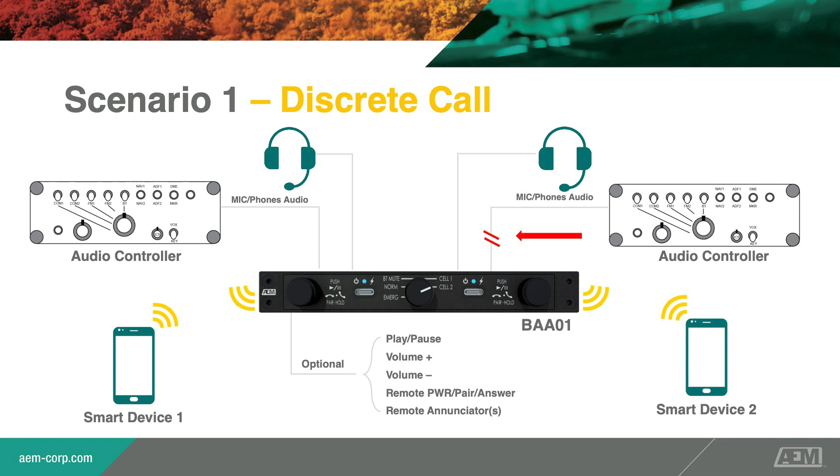From the front panel, the Bluetooth connection can be removed from the ICS. This setting also attenuates receive audio and ICS audio by 3 dB. The user is then free to have a private conversation using the connected device, while retaining the ability to hear important communication from the pilot, co-pilot, or passengers. This functionality will be highly sought after by DEA, FBI, corporate users, tech-savvy passengers, and many others.

Scenario 2: As a transceiver position. In this scenario, the BAA01 acts as a standalone transceiver from the audio controller point of view. To participate in a connected call, the user selects the BAA01 transmit position on the audio panel and routes the mic audio to the device using the push-to-talk key, the same as would be done with any transceiver. Audio from the connected device can be monitored using the appropriate audio controller receive switch.

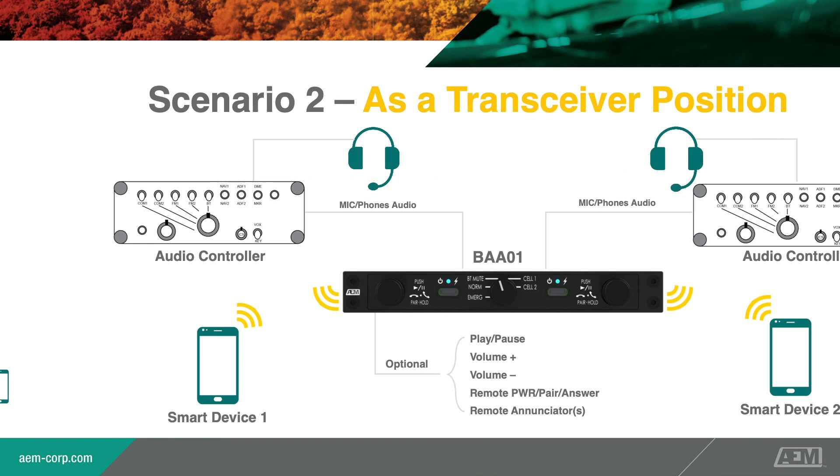Scenario 3: Passenger Bluetooth connectivity. Connect as many passengers to their devices as you want. With no need to change audio controllers or passenger headsets, simply insert the BAA01 into the ICS line of the existing audio system. Now, your passengers have the ability to listen to their devices, make discrete calls, charge their devices, all while maintaining their connection to the aircraft intercom system.

Lastly, Scenario 4: Glass cockpit connectivity. AEM audio engineers have put the hooks in place to connect the BAA01 to your glass cockpit. The protocol would be provided by the OEM on a case-by-case basis.

The TSO pending release of the BAA01 is June 2020. For more information, see the AEM website, aem-corp.com. Thank you for watching.

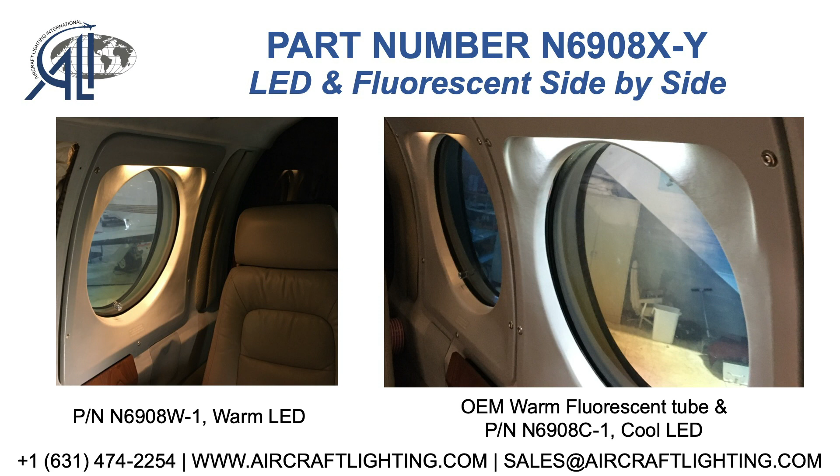The improvement in lighting from ALI's LED window lamp is self-evident, as you can see in this slide. Starting from the left, you have ALI's LED window lamp in warm white. Moving to the right, you'll find the OEM fluorescent lamp in warm white next to our LED lamp in cool white. A stark comparison. Note that ALI's LEDs illuminate the entire window frame on that King Air, and it provides a cleaner, fuller look. It's a simple upgrade that can totally change the entire feel of the cabin without changing anything else. We've installed this now on several aircraft, and the feedback is resoundingly positive.

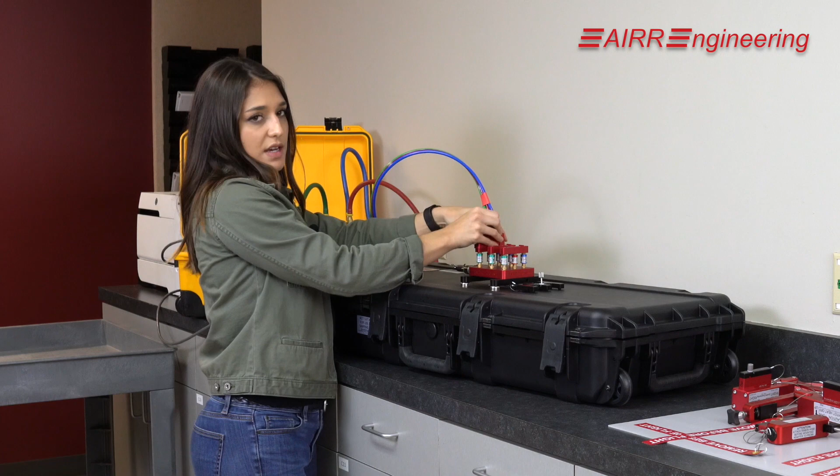Now let's take a look at how the ribbon hose speed connector attaches to the distribution manifold. First, we want to remove our dust caps. Get your hose number 1, remove another dust cap. Align the connector, tighten it down, store your dust cap, and do the same thing for the next 2.

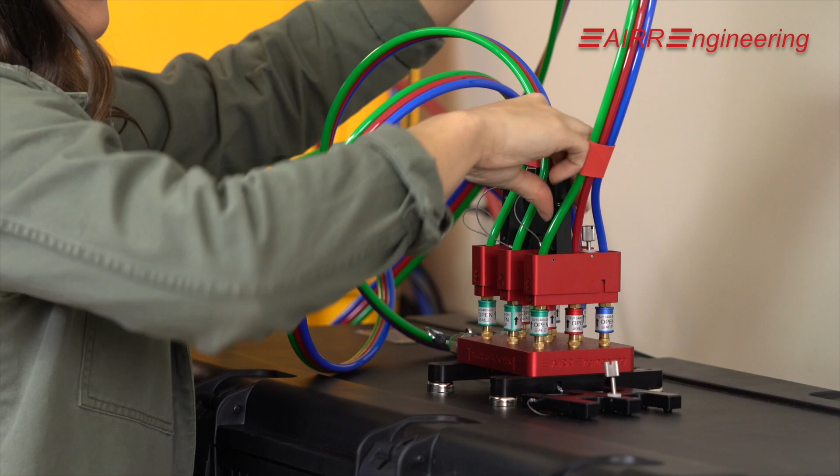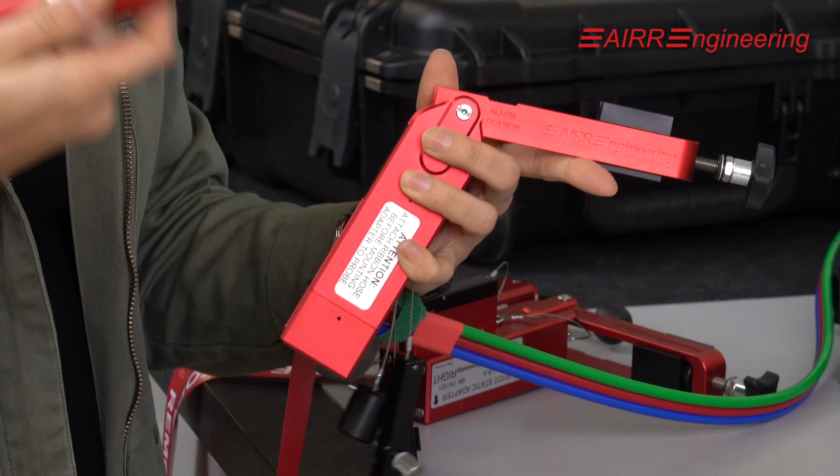Now that we've made our connections to the distribution manifold, we're going to move on to the pitot-static adapters. Same process. Tighten the connector down, remove the internal dust plug. Then you want to insert the test plug, swing the cam arm up, and tighten down the pusher. Now we're going to repeat the process with the other adapters.

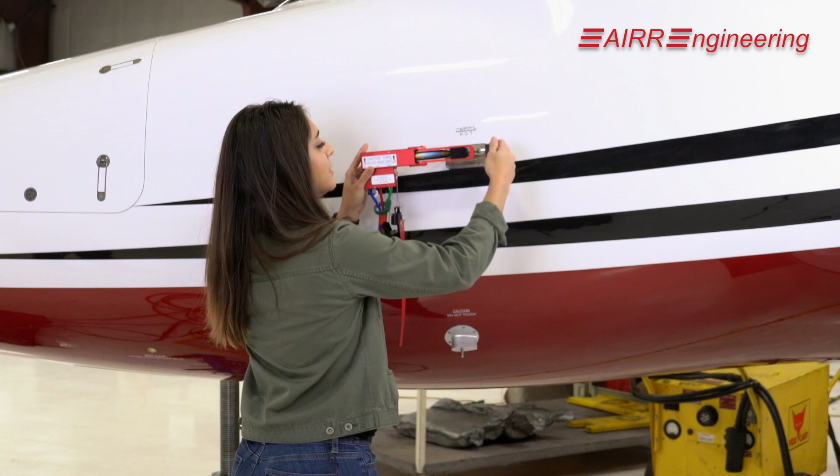Slide the adapter onto the pitot tube, rotate the arm, tighten the pusher. Lastly, you want to get your pitot saver, do a battery check. Sounds good. And pop it on. And then you would repeat the process on the other side. Just that fast, just that simple.

Activating pitot heat on a stationary aircraft can really mess up your day. AIRR Engineering has developed a simple, economical solution to warn personnel of this very dangerous situation, and we want to show you how it works.

Hi, I'm Carrie with AIRR Engineering. During years of being involved in aircraft maintenance, we've seen far too many instances of unintended pitot heat causing severe burn injuries, unnecessary downtime, and costly repairs. To prevent this situation, we have developed the pitot saver pitot heat alarm.

The Pitot Saver is an easy-to-use tool that attaches to the pitot probe in seconds and warns anyone in the vicinity if temperatures in the probe reach elevated levels. The Pitot Saver is available in single and twin sets, comes complete with custom padded hard case, flags, batteries, and instructions. The device is constructed from rugged aluminum alloy and polycarbonate.

Every tool is proudly built in the USA and is backed by AIRR Engineering's standard of excellence. Designed to work with the pitot covers or in conjunction with other testing equipment, such as our innovative pitot probe adapters, the Pitot Saver uses audible and visual alarms to warn of pitot heat activation.

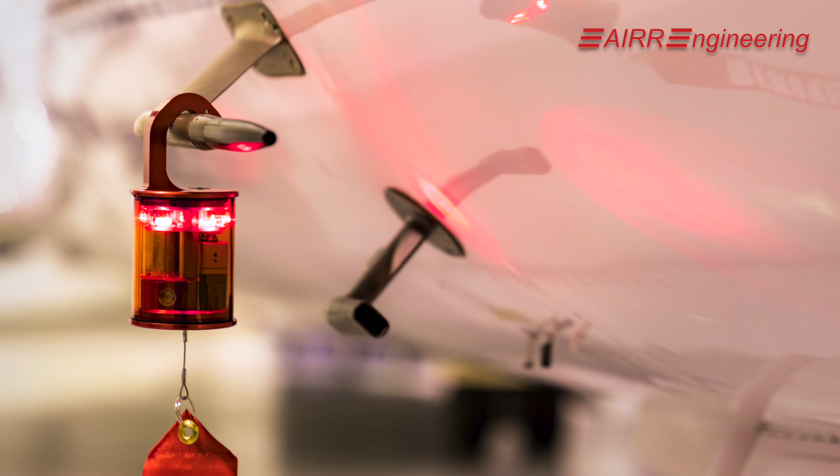The Pitot Saver is always on and ready to go. Just do a quick battery test and then hang it on the pitot probe. One alarm is used on each pitot heat circuit.

On the ground, pitot probe temperatures can reach extremely dangerous levels. During routine maintenance, the pitot heat can be triggered unintentionally by airspeed, altitude, a wheels-up sensor, system power, etc. As you can see, when the pitot temperature approaches a dangerous level, bright flashing LEDs and a piercing alarm will alert anyone nearby that something is in need of their attention.

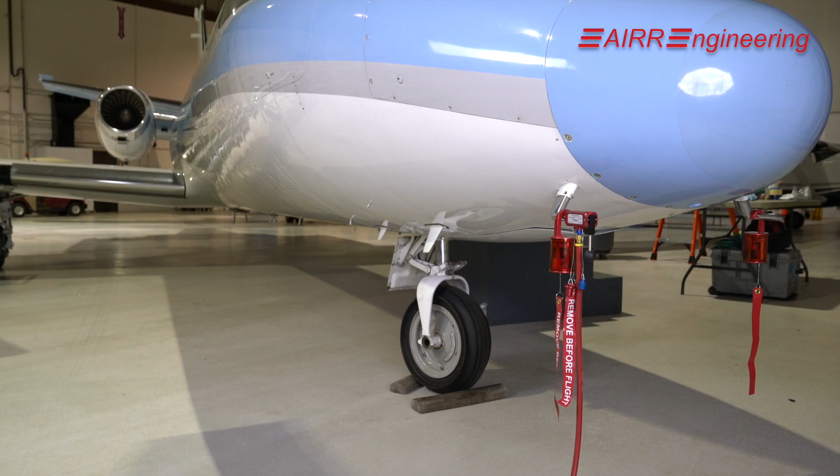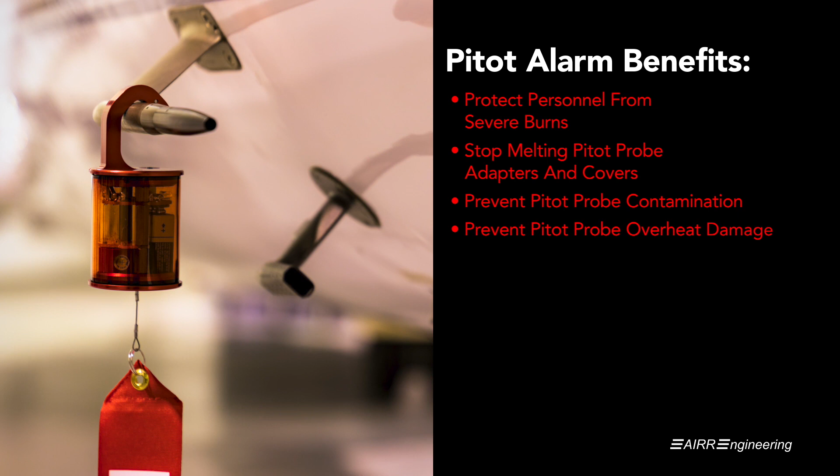Protect personnel from severe burns. Stop melting pitot probe adapters and covers. Prevent pitot probe contamination. Prevent pitot probe overheat damage. Protect the integrity of the flight data system. Prevent unsafe flight or grounded aircraft. Avoid unnecessary liability. And meet OSHA 29 CFR Part 1910.138 safety requirements.

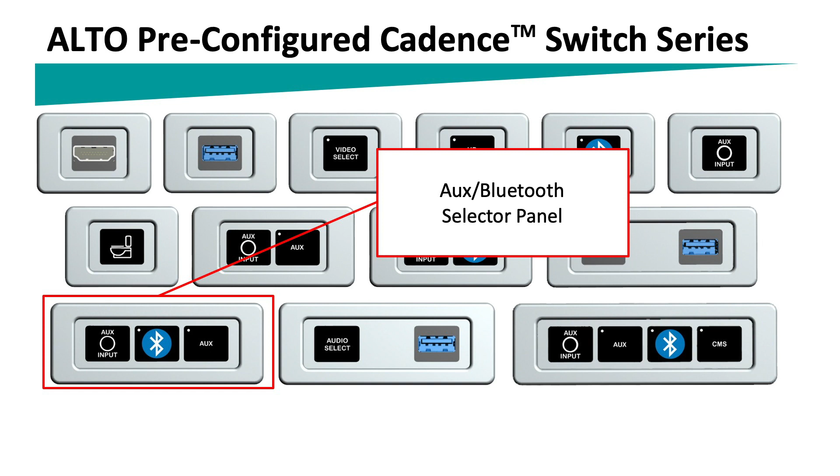We can provide panels for those customers that wish to add headphone audio to their aircraft cabin. This combined HDMI, USB, and aux input panel is a great addition to an entertainment cabinet for a new HD and audio source.

Many entertainment upgrades interface to existing composite video and wish to select HD as an override to their monitors. This solution allows HD override with the source input.

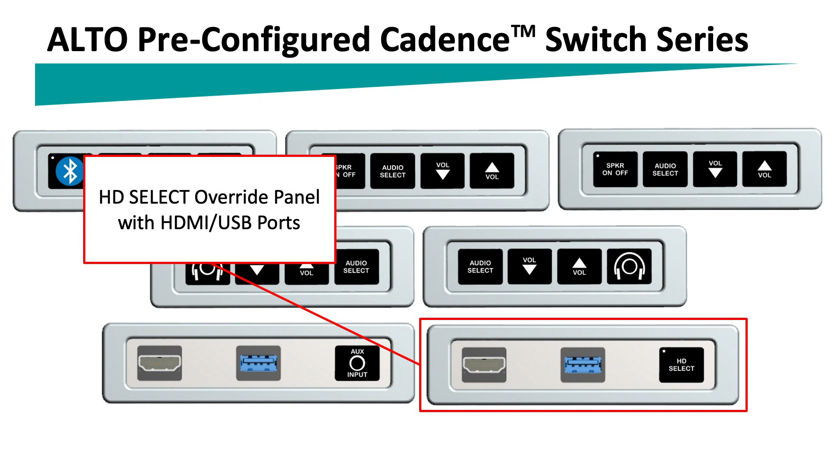Here is a complete entertainment control panel option for any cabin aircraft system. We offer an Apple TV interface panel as well, which features HDMI input with an RJ45 port for hardwired Ethernet connection to the cabin router.

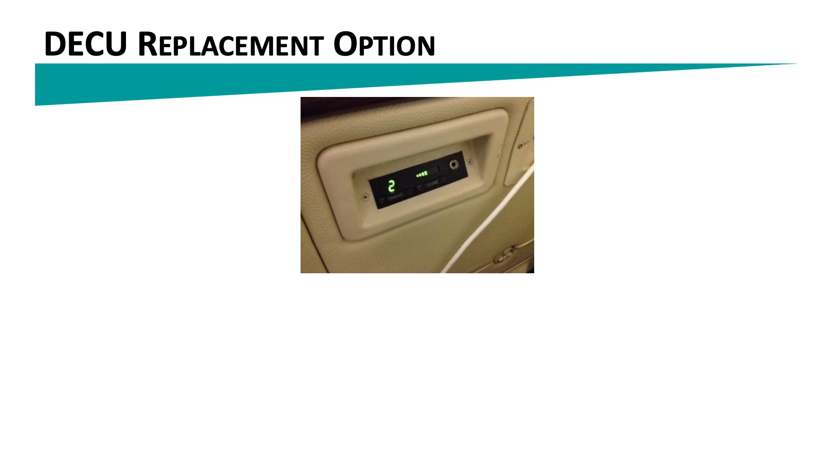Another set of panels included in this pre-configured cadence switch series is a Baker DECU direct fit replacement option. We offer a standalone USB charging option.

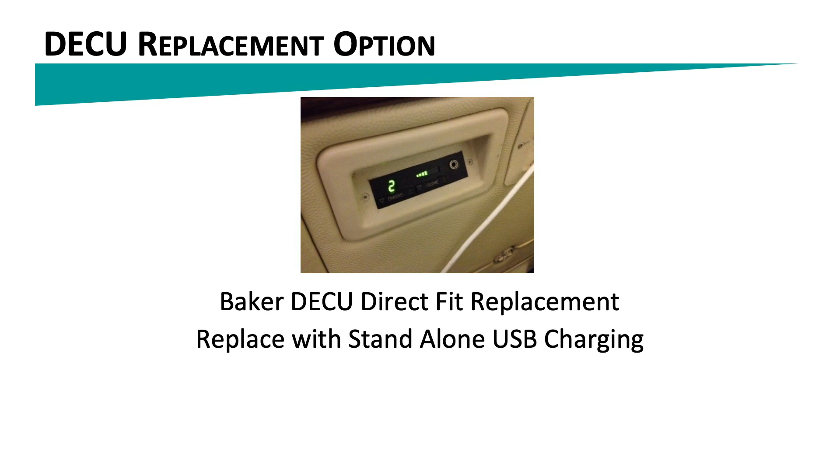We convert the former wired headset to wireless Bluetooth headphones. We also offer read and table lighting controls.

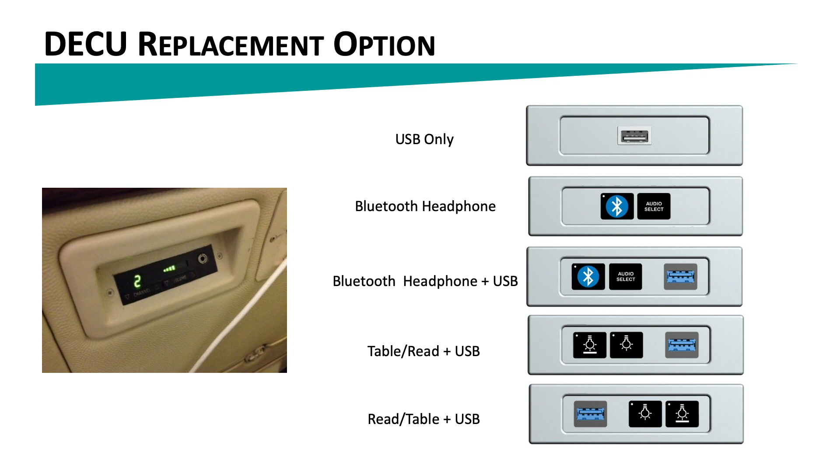These panels mount from the front and drop into the same cutout as the former Baker DECU. The direct fit replacement eliminates interior modifications and helps expedite the changeover to ALTO.

The last feature of this pre-configured series is our source equipment trim plate adapter. This adapter is designed to fit any single DIN packaged source equipment. We can support car stereo head units.

The source equipment trim plate is also front-mounted and fit compatible. There's no need for any interior modifications. These options allow Bluetooth audio to replace the former source equipment.

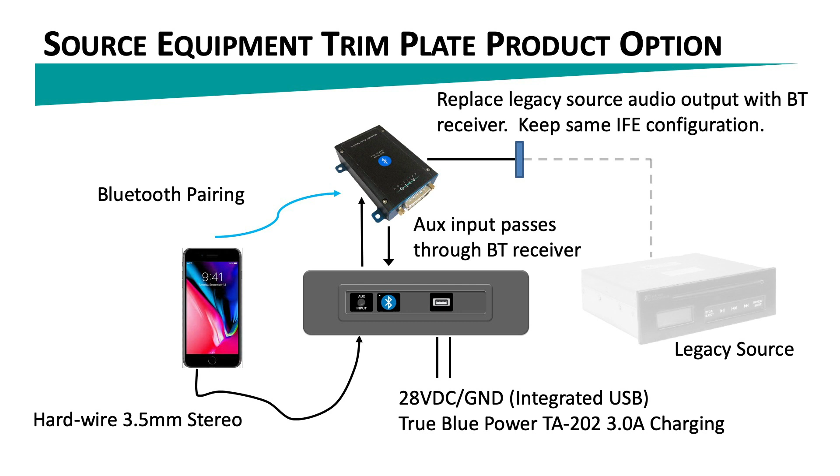Panel option 1 allows a hardwired input in addition to Bluetooth pairing. Panel option 2 adds a 3-amp USB charging port. In most cases, the existing wiring can be maintained, resulting in a quick and simple update.

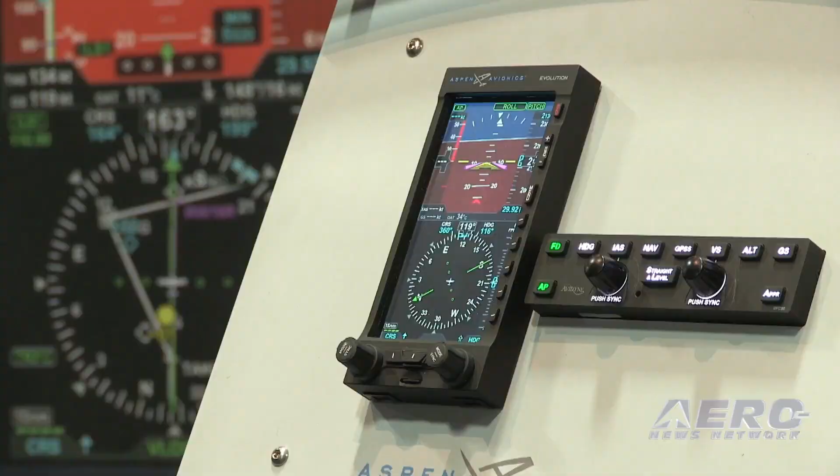But more than this, ANN has served the avionics community with distinction. Over 12 years of live streaming coverage of the best the avionics industry had to offer at AEA conventions, hundreds of stories and interviews, hundreds more video presentations, insightful coverage of the avionics business and the way it promotes and pushes aviation forward. No other aviation publication has done as much as ANN has on behalf of the avionics world, and it's about to do more, much more.

ANN's airborne video news program will soon include a new weekly program just for all things aero-electronic, a program we call Airborne Avionics. The painstaking results of nearly 2.5 decades of expert aviation journalism, Airborne Avionics is designed to bring this industry the kind of professional new media coverage it deserves and has needed for years.

No matter what aspect of aviation you work in, the Aero-News Network remains your best option for staying educated, informed, and entertained.

Traditional methods for modifying aircraft with new systems can be expensive, time-consuming, and might introduce certification complexity that complicates installation. NEXSYS Component Technology addresses these challenges.

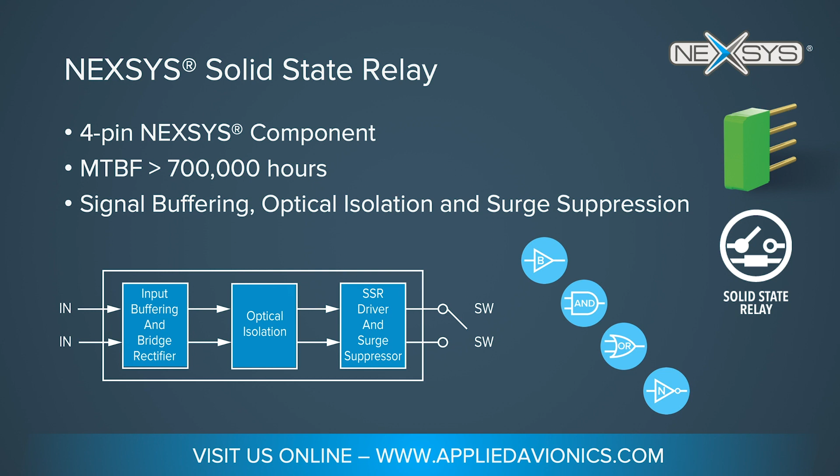In keeping pace with the industry's technology paradigm, our team went back to work. And I'm pleased to introduce to you the NEXSYS Combination Solid State Relay, or SSRC. This new 8-pin device takes the standard SSR to another level.

The new combined component packages together 4 internally connected SSRs, which increases wiring efficiencies by reducing the need for external splices. The combination SSR allows for synchronized normally open and normally closed signal switching with a bidirectional control bridge, which allows DC voltages to be applied in either direction to provide design flexibility.

The new SSRC can switch all 4 signals in parallel and offers several specific combinations, with the most typical being 4 SSRs with a single common, a dual connected pair of SSRs with 1 common per pair, and 3 SSRs connected to 1 common and 1 SSR to another.

We intend to continue developing new products, which extends the capability of NEXSYS interface solutions. As we continue to innovate, look for new NEXSYS products that provide similar wiring efficiencies and form factors.

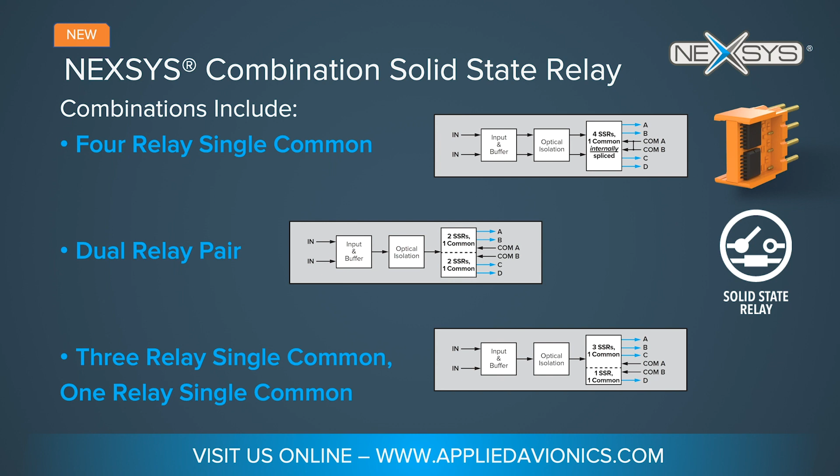Applied Avionics is committed to maximizing value through design, technology, and supporting each phase of your application. This means that NEXSYS customers have direct access to the application development team. Whether requirements are straightforward or complex, these subject matter experts can review your requirements and make recommendations to help design an electrical interface for your application. They're equipped to provide technical specifications, engineering assistance like developing wiring diagrams and generating LT-SPICE electronic simulations, to providing 3D models and even part configuration.

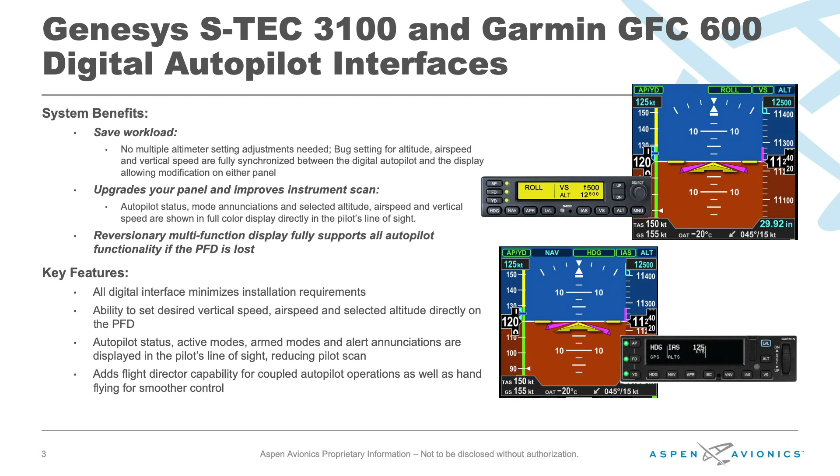With that, you would have full reversionary backup with all the autopilot functionality. So if you had a failure on your Pro, you simply would push the reversionary key on the MFD, and you'd be able to control all the features from the autopilot on the MFD.

Let's talk about new software on the Aspen E5. This new software gives you a traditional looking HSI, and we don't charge for that. You literally go into your local avionics shop, they can update your software for you at no charge to Aspen—you'll probably have to pay some shop time. If you order a new E5 today, you're going to get the traditional looking HSI.

For an optional feature, less than $500—$495—we've added a data bar which gives you true airspeed, ground speed, OAT, wind direction, and speed. That's really slick and a very powerful feature. Think of it like an air data computer. As you're coming into an airport, it's going to show you which direction the wind's blowing from and at what speed in real time. Once you're at altitude, you can see exactly how much headwind or tailwind component you have. Very nice feature.

The other thing is the GPS annunciator. Let's say you have a GPS in your panel that's outside the pilot's field of view—you're required to have an annunciator in front of you showing what mode the GPS is in, whether it's GPS or VLOC, whether you have a message, or you're approaching a waypoint. There are several annunciations required to meet the requirement. The Aspen E5 has all these built in, and we'll display those for you, so that allows you to avoid installing another annunciator.

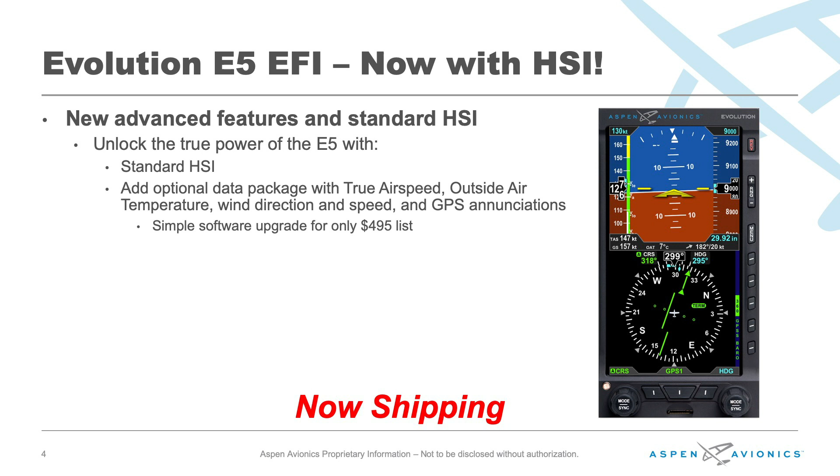All of those things are $495. It's kind of a no-brainer—a lot of bang for the buck there. So if you're thinking about an E5, definitely think about doing that optional data package.

We are announcing our new simplified pricing. When you purchase a Pro or MFD Max system, it's now going to include synthetic vision. A Pro is now $9,995, and that does include the Pro Max, which includes synthetic vision. Angle of attack and ADS-B enablement is $10,995. So for $1,000 more, you're getting two additional items, the angle of attack and the ADS-B unlock, which will display traffic as well as NexRad on the Pro.

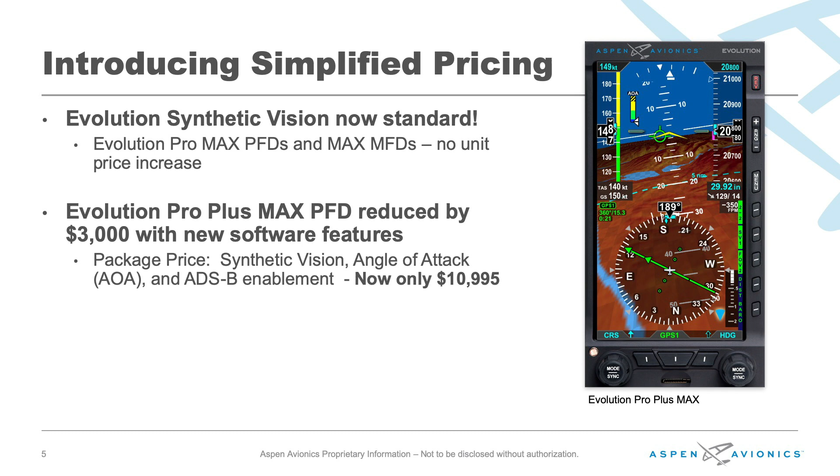Aspen is pleased to announce our multi-unit pricing reduction, starting with the 1500, which includes a Pro and 500 MFD, for only $13,995. Our most popular system, the 2000 Max with external battery, is only $15,995. With that system, you don't need any backups. You can literally cut a new panel, put in the two screens, and be done. You can really clean up your panel, pull out your vacuum system, all with the Evolution 2000 Max with external battery—only $15,995.

Our 2500 system, which includes the Pro, the 1000 MFD, and the 500 MFD—and the 1000 MFD would have the external battery—is now only $19,995. So the biggest difference between a 2000 and 2500 system is the addition of that 500 MFD. Also note that external battery is now standard on the 2000 and 2500 systems, an additional $1,000 savings.

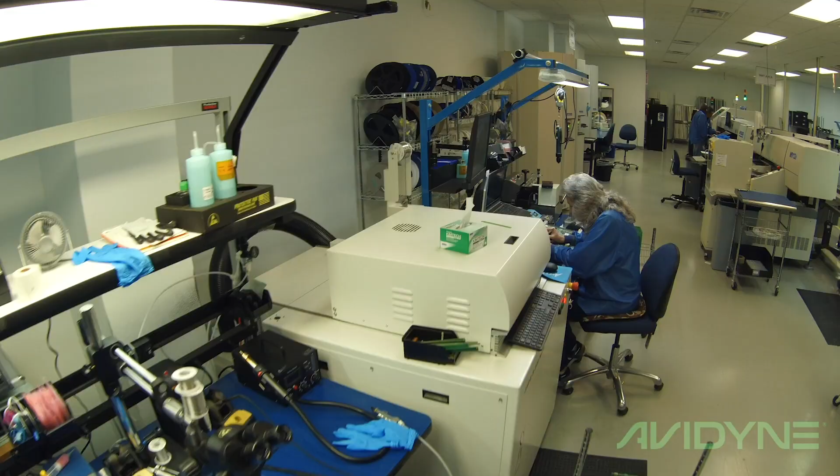Avidyne is very well positioned in the avionics market today. 2020 is the year where we're going to take some of the business aviation progress we made in 2019 and really turn it into a central focus. General aviation has been the cornerstone of our business at Avidyne for over 25 years. We've taken what we've learned there and applied it to other market segments, helicopters and business aviation. Even with our growth upmarket, we continue to develop innovative products that benefit all of our pilots. Our pro pilots were telling us, I wish I had the function of our IFD in the FMS that I fly every day.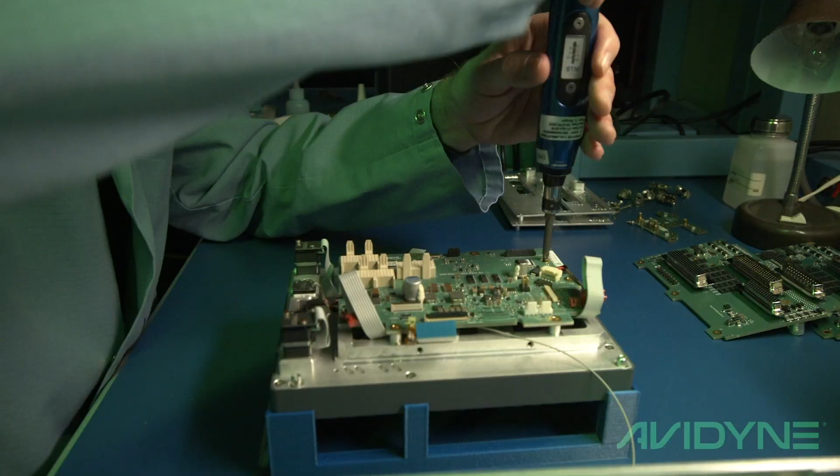So we listened, and in the fall of 2019, we launched Atlas. One of the real values of Atlas is that it gives new life to legacy aircraft that don't need a $1 million avionics upgrade, but would like to have LPV, be able to run their TCAS, and consolidate their controls in an easy-to-use, understandable format.

The Avidyne approach is to develop a partnership with our dealers, not tell them what to do, but provide them with the tools they need to be successful. In 2020, Avidyne will be launching our new dealer portal, as well as our training app, which will give our dealers access to installation documents and training videos from their mobile device while in the aircraft.

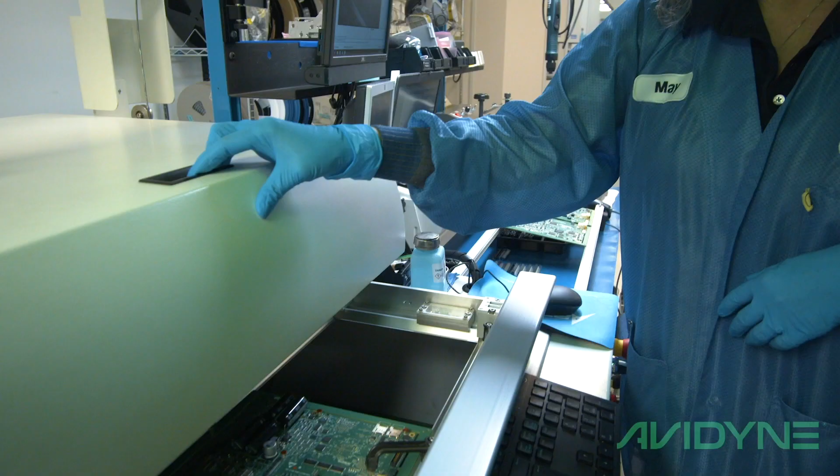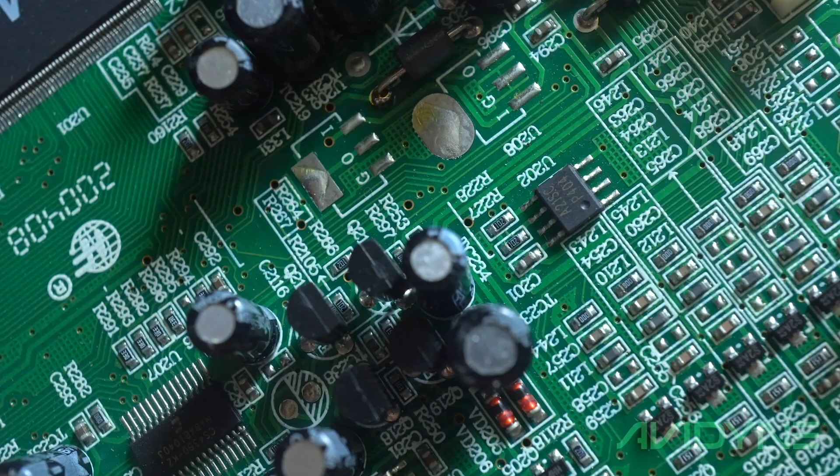Avidyne has made, in the last year or so, significant investments in a number of areas. We've replaced our screen printers, our pick-and-place equipment, and our selective soldering systems, which allows us to build a lot more cards for the expected volume we're going to have in the future. We build very high-quality cards with these systems, and we'll be doing so for a long time.

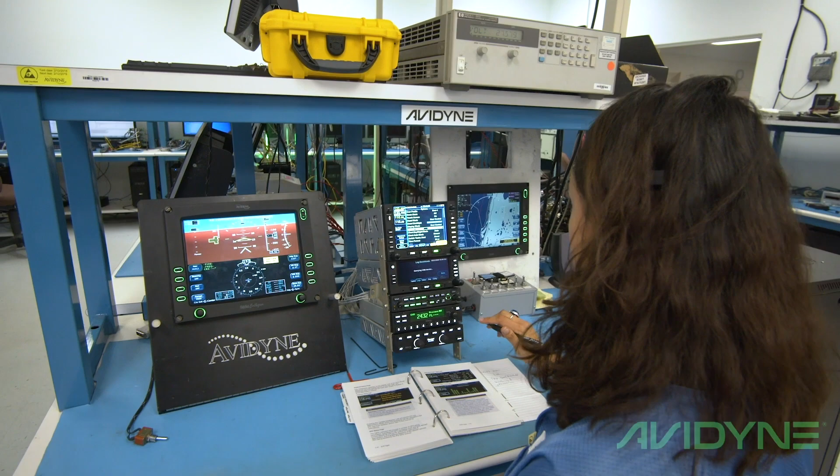In addition, we have a project going on at the Orlando Melbourne Airport where we're building our own hangar, which will allow us to improve our certification test flight activities along with better accommodating customers who fly in to visit us. Going forward, the future is bright for Avidyne.

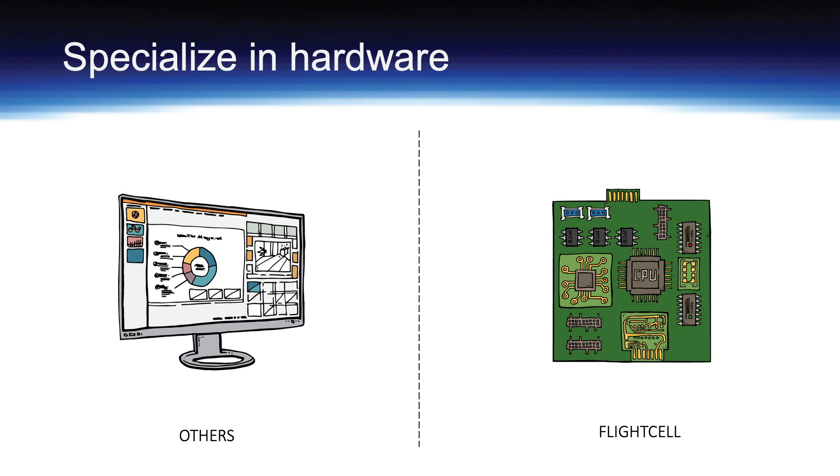Flightcell International is a pioneer in aviation communications, and it has never followed what other companies have done. For example, Flightcell decided some time ago to focus on hardware and its associated firmware, and to not be distracted by software services such as mapping and airtime. This means customers can use any service provider with their equipment.

When they designed the Flightcell DZMX product, the trend at the time was to have multiple units, a transceiver in the avionics bay, and multiple control and display units for the crew. Whereas with the DZMX, they produced a single, compact unit that is installed in the cockpit, with an optional remote head unit for the cabin, if required.

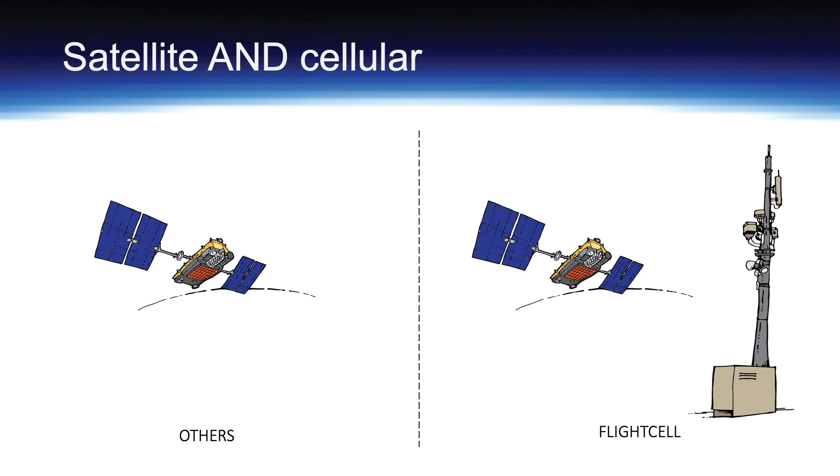In most cases, satellite only has been the preferred technology used for voice, data, and tracking. Early on, they added cellular technology to the mix and offered both satellite and cellular capabilities and the efficiencies and cost benefits that it offered customers. You are probably thinking, that's all very nice, but why are you telling me this? I'm telling you this because for a brief period, they're going to conform and do what others have been doing.

The new product has a transceiver unit that fits in the avionics bay, and in some cases, it is close to a direct swap out for existing legacy SATCOM units. Operators can now upgrade to the latest technology without major installation changes. Flightcell have called it the DZMX Plus.

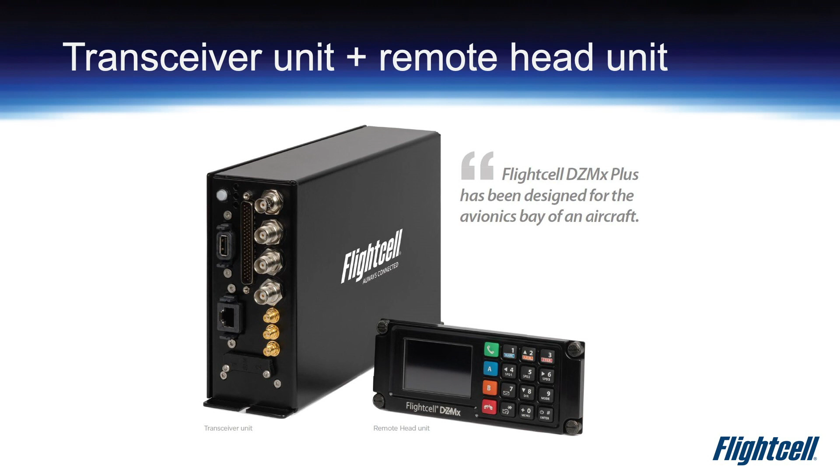It has all the functionality of the DZMX product, but in a different form factor. A larger form factor allows for additional hardware functionality to be added at a later date. It uses the existing DZMX remote head as its user interface. The transceiver unit has 4 connectors for exterior antennas and 3 SMA connectors for Wi-Fi and Bluetooth antennas and for ADS-B in functionality, which they are aiming to have available later this year.

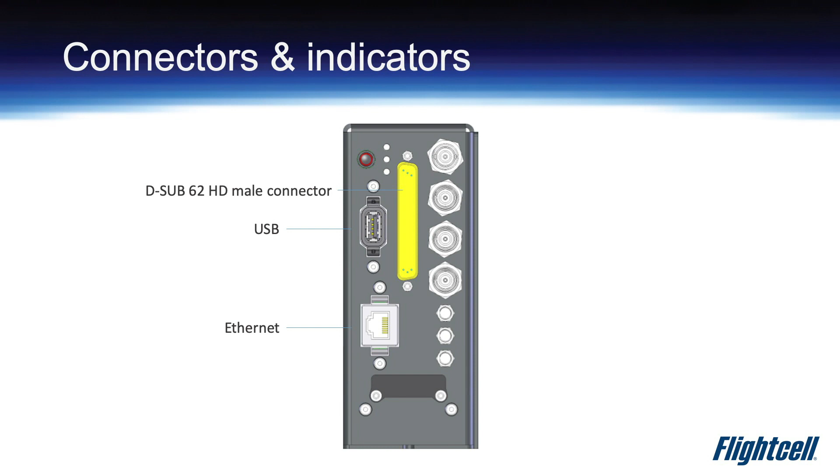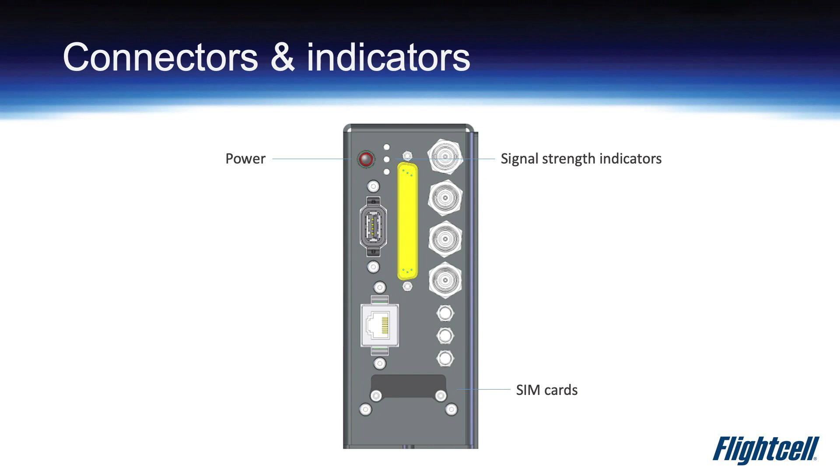There's a D-Sub-62 connector for power, external inputs and outputs, and control. There's a USB port for firmware upgrades and transfer of files via Dropbox, and an Ethernet port for connected devices, giving them access to the internet via cellular data. There is a power button, 3 signal strength indicators that indicate the strength of received modem signals, and 2 SIM card slots. From the get-go, the DZMX Plus will have all of the core capabilities of the DZMX and all of the add-on options and apps listed here.

We've released 2 brand new options recently. The first is a direction-finding capability for search and rescue. When paired with the Rhotheta RT-600, it lets air crews use a tablet to home in on emergency locator beacons. They are given a bearing to fly on, and they can view their aircraft and their target on a moving map. The second is Marine AIS, which stands for Automatic Identification System. It is very similar to both direction finding and ADS-B for aircraft, allowing aircraft to identify the location of marine vessels and fly on a bearing to intercept them.

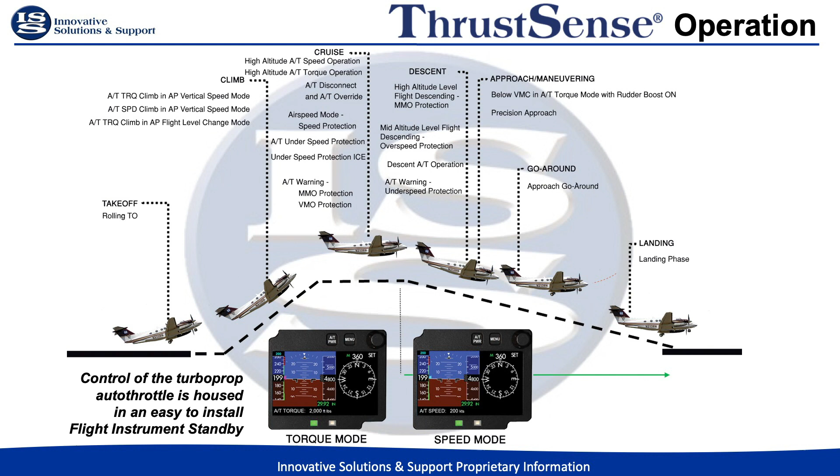ThrustSense manages engine power through all phases of flight while assisting in protecting the engine against costly damage. The system controls power to help prevent overtemperature operation at excessive power levels. ThrustSense helps reduce flight crew workload during all phases of flight by automatically managing power from takeoff roll through climb, cruise, descent, landing phases of flight, including go-around. The system also assists in monitoring and protecting against overspeed damage and underspeed stall.

Another patented safety feature is the FAA-certified VMCA protection against loss of control for twin-engine aircraft. If a King Air engine fails and the aircraft's airspeed falls below its minimum control speed in the air (VMCA), the aircraft can experience a loss of control. However, aircraft equipped with a ThrustSense system can dynamically adjust power on the remaining engine to assist the crew in maintaining safe control of the aircraft.

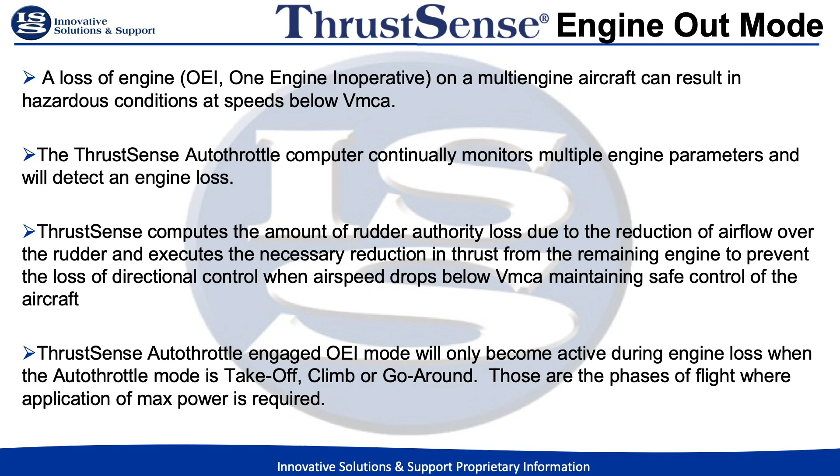ThrustSense computes the amount of rudder authority lost due to a reduction of airflow over the rudder and executes the necessary reduction in thrust from the remaining engine to prevent the loss of directional control when airspeed drops below VMCA, maintaining safe control of the aircraft.

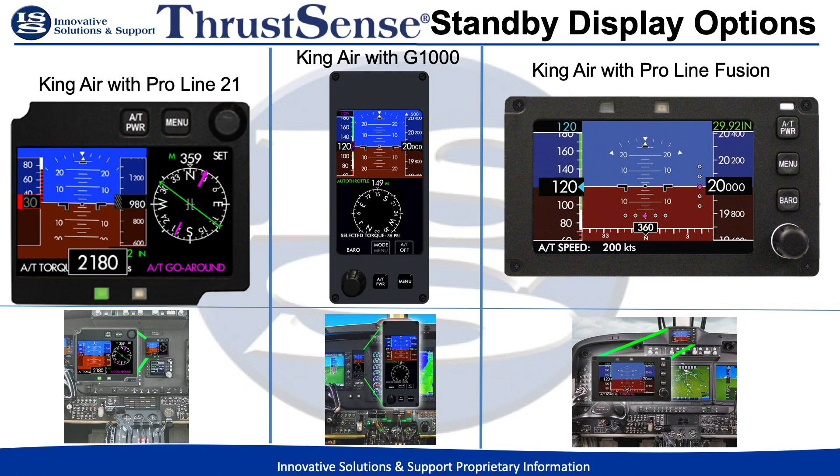Command of the revolutionary autothrottle is housed in an easy-to-install integrated standby unit, ISU, that additionally provides autothrottle control interface. The optimized design for retrofit allows for no structural modifications to the existing throttle quadrant.

ThrustSense is installed by replacing the current standby instrument in the airplane with the ISU integrated standby unit, which also has ThrustSense pilot-operated controls and a computer for ThrustSense operation. The autothrottle actuation mechanism is installed in the throttle quadrant in line with the power levers and the existing engine cables. Pictured are the ISUs for the different King Air cockpit variants that ThrustSense is FAA certified for. For the King Air and the PC-12, these ISUs are form, fit, and function replacements for the existing standby unit in the airplane.

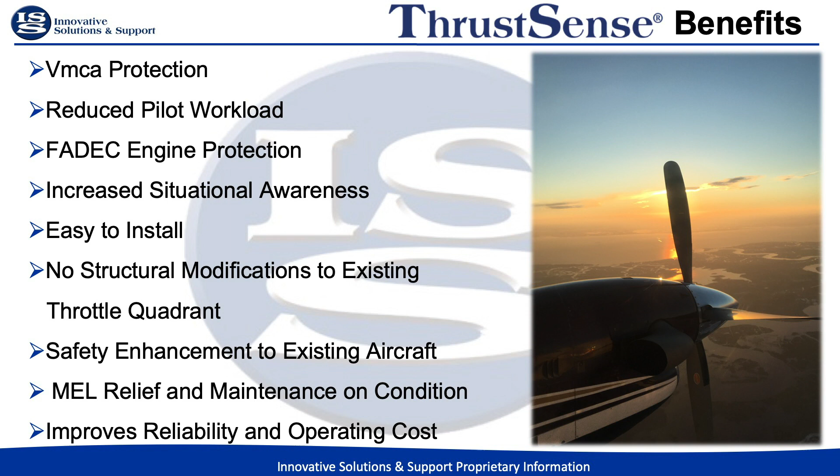The list of benefits that ThrustSense offers to PC-12 and King Air are only offered on the most advanced business jets. This is a full regime autothrottle, engaged for takeoff and taking the plane to its max operating limits per the POH throughout the entire flight envelope. These include VMCA protection, reduced pilot workload, increased situational awareness, FADEC engine protection. It's easy to install, with no structural modifications to the existing throttle quadrant. It's a safety enhancement to existing aircraft, integrated with the latest technologies that improve reliability and operating cost. ThrustSense is truly a full regime auto throttle with FADEC and speed limit protection.

This is the first time an FAA STC turboprop auto throttle system has been offered to the PC-12 and King Air. The real deal? You bet.

If we're going to do the incredible stuff that we do with recorded flight data, it starts with functional flight data recorders. You've probably heard the techie expression, garbage in, garbage out. In other words, if you start with bad data, you'll end up with bad data.

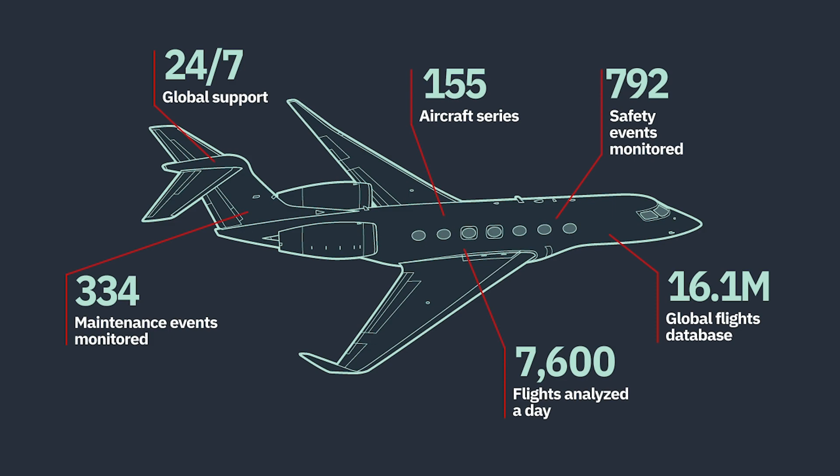In the avionics industry, many of us already know that flight data recorders are required to undergo regularly scheduled parameter checks, also known as readouts. Essentially, a readout is a diagnostic report for your recorder. Only many of the reports on the market aren't all that diagnostic.

In fact, they're borderline cryptic. Wouldn't it be great if a readout report could actually say which parameter is broken and what its symptoms are? Better yet, why does it have to be just a paper report?

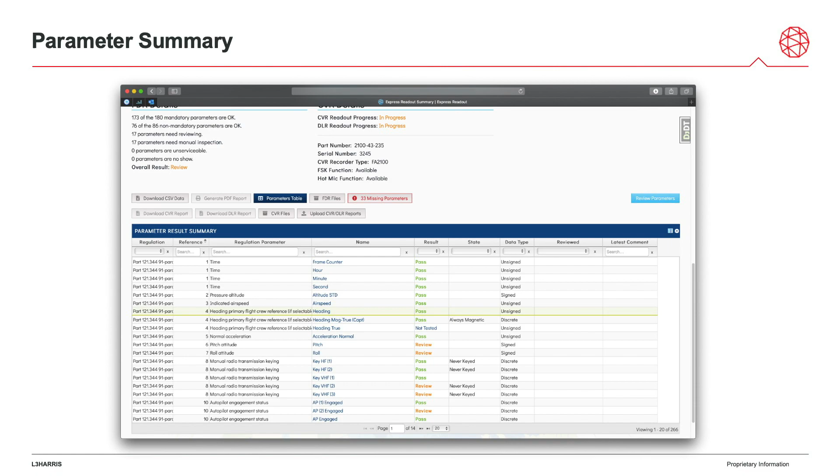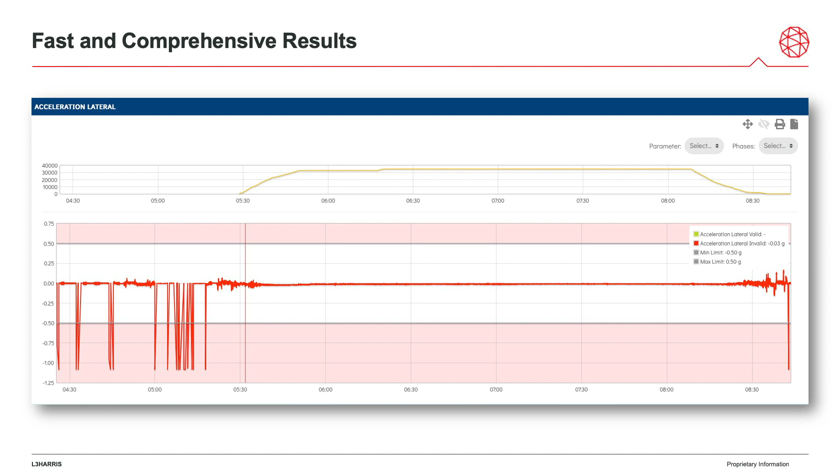Need a CVR or data link intelligibility test? We have that covered too. Whether you represent an airline with hundreds of aircraft or a corporate flight department of one, no one has the time to wait on a readout or intelligibility test. You certainly don't have time to diagnose what's broken. Isn't that what you're paying your readout service provider for? We provide avionics shops, MROs, and aircraft operators with fast and comprehensive results so that they can fix the problem and move on with their day.

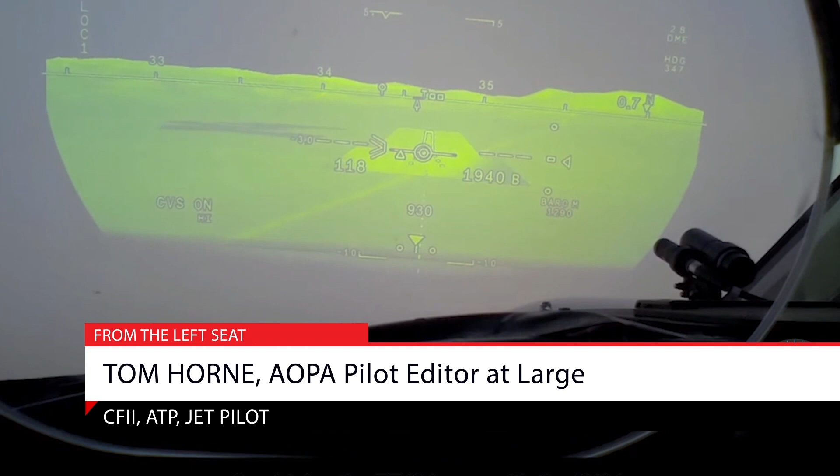Head-up displays, HUDs, are on several high-end biz jets, but now they're available to piston singles, turboprops, and light jets.

During the takeoff run, you'll see the magenta flight director cue and green flight path marker pop into view on the attitude indicator. Liftoff comes at 70 knots on the airspeed tape, so maneuver the flight director cue into the flight path marker and you'll be on course. Or put the jelly, the purple cue, into the donut, the green flight path marker. It's that easy to stay precisely on course.

The marker is great for holding altitude in steep turns. Just keep the marker over the cue and you won't lose or gain altitude. Now for an RNAV GPS approach to runway 17 left.

It's easy to read, and I was a little skeptical at first if it was going to be able to provide me the same level of information I get in the multi-million-dollar HUDs that I have at work, and it does. It's incredibly impressive.